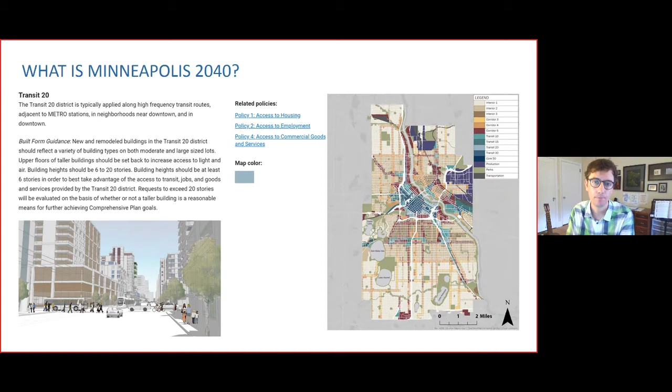Next slide, please. Implementing the built form elements of Minneapolis 2040 is the current focus of our work. These regulations include the height and scale of buildings allowed in each built form district found on that map in Minneapolis 2040.

What our process will not cover at this time is we are not re-examining or changing Minneapolis 2040 maps or making policy changes to Minneapolis 2040 itself. This is simply adopting regulations that support those policies. At this time, the process also does not include changes to where, for example, commercial uses are allowed or required. That's work that we will be doing in the future, likely in 2021, 2022.

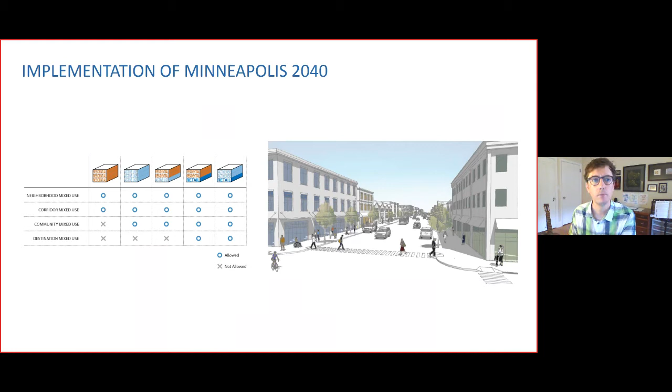Next slide, please. These changes to our zoning ordinances are intended to bring consistency between our zoning regulations and the policies and maps found in Minneapolis 2040. This consistency between plans and zoning is something that's required of us by state law.

We started working on this process last year. Two zoning code changes took effect in January of this year. One was a change that allowed 3 residential units on every property in the city that allows residential uses.

So there are no longer zoning districts in the city that are exclusively zoned for single-family use. The second change is an inclusionary zoning regulation. What that means is that new apartment and condominium buildings are required to provide a certain percentage of their units as affordable.

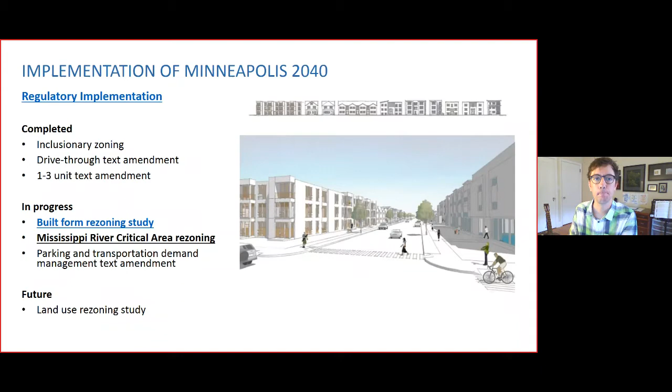These standards are critical components of implementing the goals of the city's comprehensive plan, including eliminating racial disparities, combating greenhouse gas emissions, and increasing access to jobs and housing.

Minneapolis 2040 is much more detailed than previous citywide plans. It clearly spells out the land use and built form categories for every single property in the city. Part of the reason for that is to create more predictable outcomes for all interested parties during the development process. In the past, there wasn't always very clear policy guidance regarding things like how tall a building should be in a certain part of the city.

Minneapolis 2040 changes that. Also, it's been fairly common for developers to submit variances that allow flexibility from certain standards like setbacks and allowed square footage. Our intent is that these new regulations will be applied more rigidly with far fewer variances requested or granted.

Next slide, thank you. All the information you need to review proposed changes to the zoning code can be found at minneapolis2040.com. When you arrive at the website, there is a link at the top of the page highlighted in yellow that will bring you to the built form rezoning study content.

There you can find background information on Minneapolis 2040, info about events like this, and a tentative timeline for review and adoption of these zoning changes by the Planning Commission and the City Council. Most importantly, information about the zoning code changes themselves are available in a couple of formats, and at the end of the page is a form that we would encourage you to use to submit feedback to us.

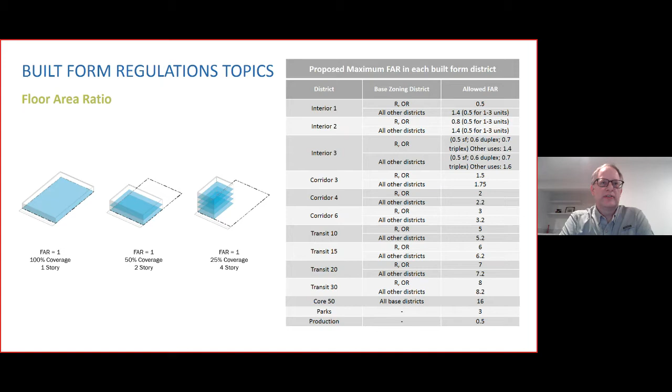So to arrive at allowed FAR, you take the size of the lot and multiply that by the FAR number. For example, if a property is subject to a floor area ratio of 1.0, you take the size of the lot and multiply that by 1, and that's the allowed square footage of the building on that site. This diagram on the left-hand side just shows three very oversimplified examples of how a property with an FAR of 1 could be arranged, how that floor area could be arranged.

So an architect who's designing a project has to understand how FAR intersects with other rules. In a district that's limited to 3 stories, for example, arranging your FAR within a 4-story configuration would not be an option. Looking at the table on the right-hand side of the slide, these are the base FAR numbers that are proposed in each built form district.

In the Interior 1 and Interior 2 districts, we're proposing to keep single-family, duplex, and triplex FAR regulations essentially the same as they are right now at 0.5. And that's the regulation that has historically been in effect for single-family homes since we started regulating FAR for single-family homes. In the Interior 3, just going a little bit farther down to slightly more intense built form districts, we would allow a slightly higher 0.6 for duplexes and 0.7 for triplexes.

And in this table, you'll see that each built form district would have a separate regulation based on whether they are paired with residential zoning, that's the R and OR, residence and office residence districts, or whether they're in a commercial or industrial district.

So that's where it refers to all other districts. Proposed FAR would be slightly higher in the non-residential zoning districts, where you typically don't have setbacks and other things that constrain the volume of a building in quite the same way.

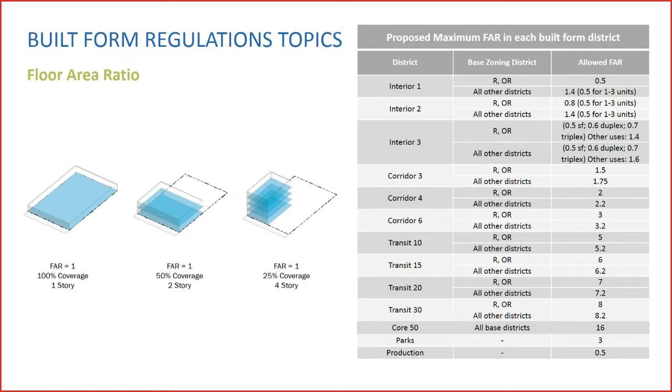Thank you, Jason. Height regulations govern the overall height of buildings and structures. In the built form overlay districts, the focus of the height regulations is on principal buildings. There is specific guidance in the comprehensive plan for height maximums and height minimums in stories.

The maximums are what can be built as of right. In the draft amendment, each district has a maximum height in stories and feet, because the height of a story can vary from building to building. There are exceptions to the table included on the right.

Some of those exceptions are less restrictive, some are more restrictive. Those are described in more detail in the information included online. Minimum height requirements are applied where higher intensity buildings are needed to accomplish comprehensive plan goals, but these do not apply in all districts.

These regulations work together with the FAR regulations to help achieve the goals of the comprehensive plan. Next slide, please.

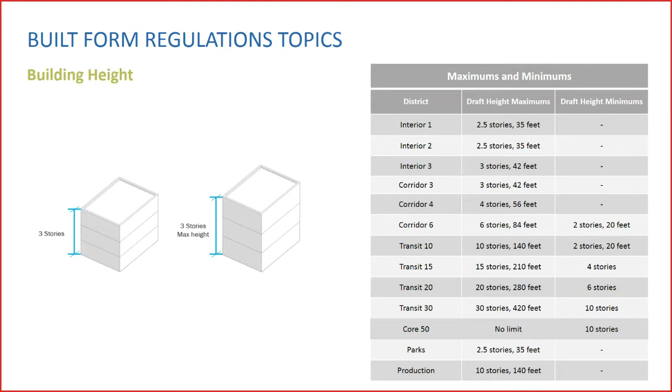A request can be made to increase maximum height. In general, height increases are expected to be more difficult to obtain than they are now. The height increase requirements would depend on the location and the type of use.

Specific to the corridor, transit, park, and production districts, the guidance states that requests to exceed the maximum height will be evaluated on the basis of whether or not a taller building is a reasonable means for further achieving comprehensive plan goals. To address the direction from the comprehensive plan, height increases will be subject to 3 requirements.

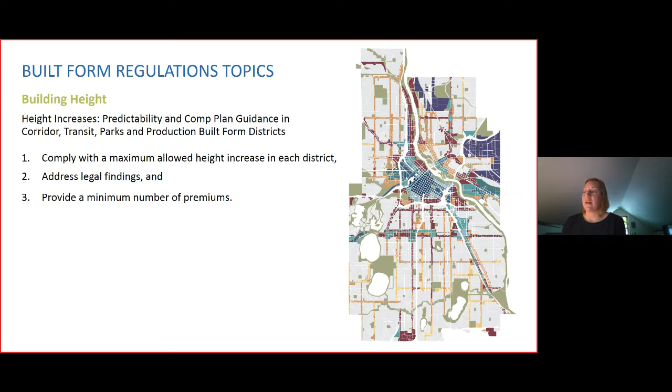The first is compliance with the maximum allowed height increase in each district. This means there will be a cap or limit on height increases. This cap is intended to help with predictability and maintaining the intent of each district.

The maximum allowed increases for the corridor and transit districts align with the maximum height of the next built form district. For example, the maximum allowed height in corridor 3 is 3 stories, 42 feet. The maximum allowed height increase in that district that could be requested is for 1 story, 14 feet, or for a total not to exceed 4 stories, 56 feet—which is the same as the maximum allowed height in the corridor 4 district, the next district up.

Parks and production districts will also have a cap for height increases. If a height increase request does exceed what is allowed for any district, a rezoning and a comprehensive plan amendment will be required. Both of these applications require a public hearing with the Planning Commission and the City Council.

The second requirement for height increase is addressing legal findings. Legal findings are currently required, but they are proposed to be amended to be better tailored to address height increases. These specific findings are included on the website as well, and the findings do allow discretion to be applied.

The third requirement is that a minimum number of premiums need to be provided. To further achieve the goals of the comprehensive plan, each premium is tied to 1 or more goals. The height increase premiums have been drafted to be above and beyond what is typically seen in developments. Each height increase request would need to provide 1 or more premiums, depending on the size of the increase. Generally, larger increases will require more premiums.

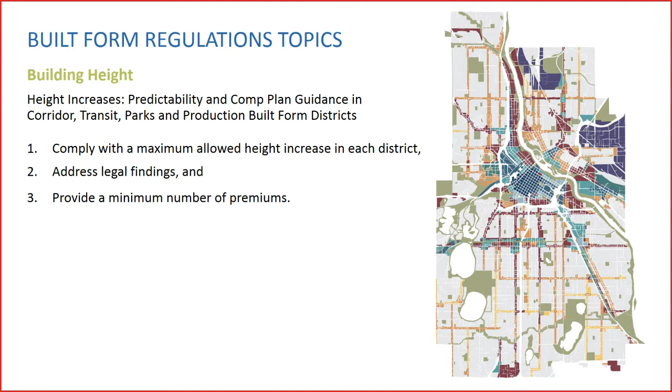As with height, floor area ratio may also be increased by providing premiums. On the slide here, these are all the potential premiums that could be pursued in order to increase height or floor area ratio.

All premiums are tied to the goals of the comprehensive plan, whether it's for FAR or height, and they do exceed the minimum ordinance requirements. They're also intended to benefit the surrounding community in some way. They are not intended to be discretionary, so specific standards for each incentive must be met in order to qualify for the premium. The specific standards that have been drafted are included on the website for review.

The premiums are drafted in a way to ensure that they are practical to achieve, but still result in a community benefit. You'll notice some similar types of incentives for FAR and the height increase premiums. But similarly titled premiums do not typically have all the same requirements when it comes to FAR versus a height increase. The height increase premiums are generally intended to be a little more difficult to achieve than the FAR premiums, so additional standards or a higher threshold usually apply to the height increase premiums. In other words, if you qualify for a FAR premium, you don't necessarily qualify for the height increase premium.

One example would be affordable housing. That's an incentive offered for both floor area and height. In addition to meeting the standards for the FAR premium, something more will need to be provided to qualify for the height increase premium, such as additional affordable units, diversity of unit types, or energy efficient units.

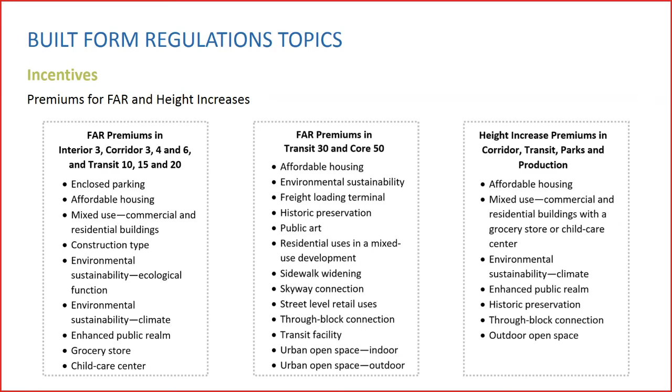Just a reminder, the premiums is a specific topic related to one of the questions we had earlier. So we would again like your feedback on whether or not these are the right premiums to further achieve the comprehensive plan goals. Next slide, please.

Thank you, Janelle. I'll talk about lot sizes now. Lot size regulations govern both the minimum and the maximum size of lots. Minimum lot sizes are intended to primarily meet the two objectives noted here: first, to recognize practical, functional space requirements associated with different uses; and second, to reinforce existing or desired development or built form patterns in different built form districts.

Proposed standards make more use of maximum lot sizes than we have historically done in the past. Such standards limit how many properties can be combined together into a single parcel for redevelopment. So the intent there is to limit the scale of new development by limiting the number of properties that can be combined into a single lot. Next slide, please.

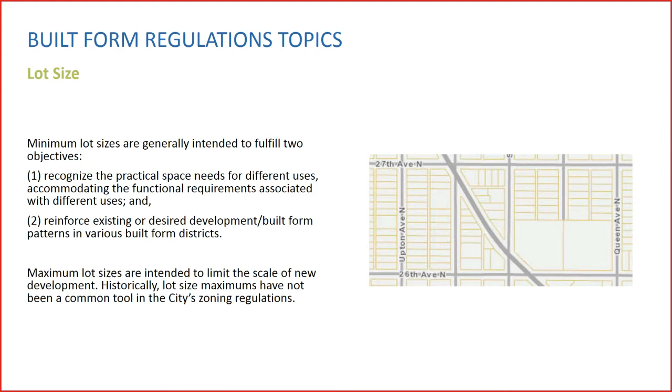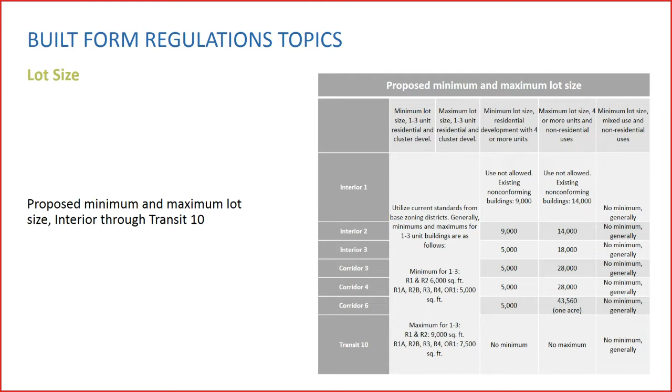I won't go through these line by line, but the lot regulations for 1 to 3 unit buildings would basically stay the same. You can see the minimums and maximums for buildings with 4 or more residential units in the second column from the right. And in the right-hand column, we're showing that commercial uses and mixed-use projects in commercial districts would continue to not have minimum lot sizes, with the exception of certain very specialized uses. Next slide, please.

We have a couple of slides to demonstrate examples of maximum lot sizes. This slide shows Corridor 4 policy guidance along Lowry Avenue Northeast. You can see that the district would typically extend about 4, sometimes 5 standard lots from the corridor itself of Lowry Avenue in this case. With each of these lots being roughly 5,000 to 6,000 square feet, that roughly aligns with our proposed maximum lot size in Corridor 4 of 28,000 square feet. Next slide, please.

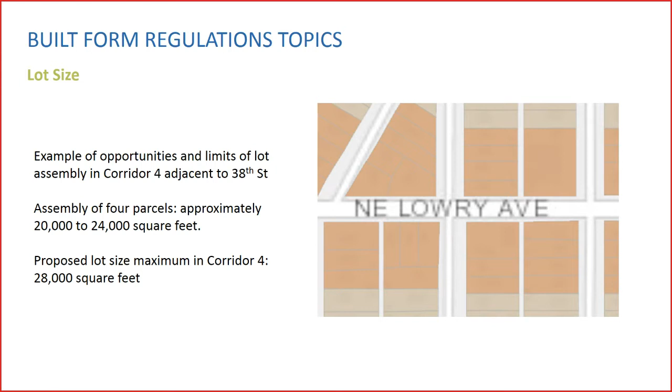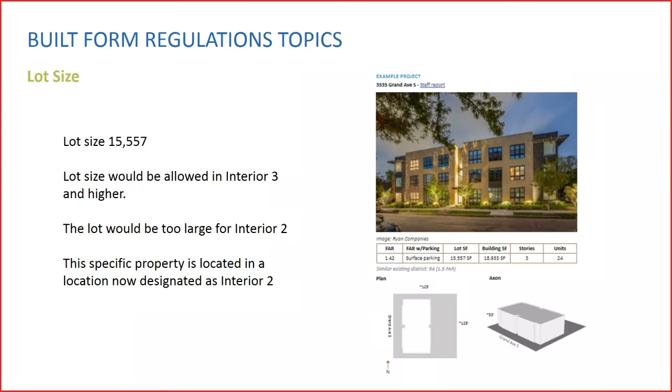In this slide, you see an example of an existing development at 3535 Grand Avenue South. This happens to be on a lot that has a little over 15,000 square feet. That means this development would first be allowed in the Interior 3 district. The lot itself would be too large to be assembled in the Interior 2 district. I'll turn it back to... I'm sorry, I think next slide is lot coverage and impervious surface, which I will also cover.

Lot coverage addresses the amount of a lot that can be covered by buildings, both principal and accessory buildings, so houses, garages, sheds, etc. In the Interior 1 and Interior 2 districts, we're proposing to match the lot coverage standards that currently exist in our lowest intensity zoning districts. Then you'll see those numbers increase slightly again as the district gets more intense. We would continue to not have maximum lot coverage standards in our commercial zoning districts. Next slide, please.

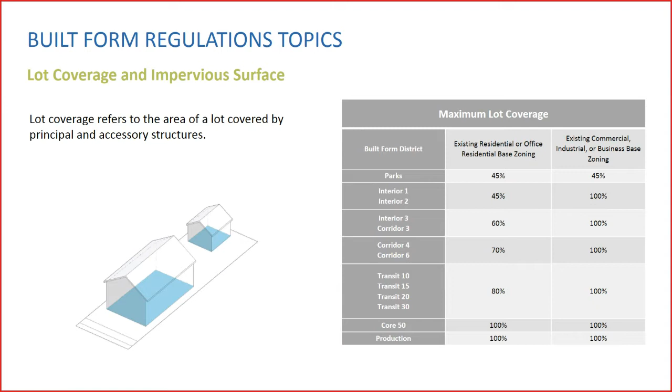Maximum impervious surface works in conjunction with lot coverage standards. It addresses not only buildings but also additional impervious surfaces like walkways, driveways, and patios. So it's a slightly higher number than the lot coverage number.

In Interior 1 and Interior 2, we're proposing to match the impervious surface standards that currently exist in those lower intensity districts. No maximum impervious surface standards would exist, as is the case today, in commercial, downtown, and industrial zoning districts.

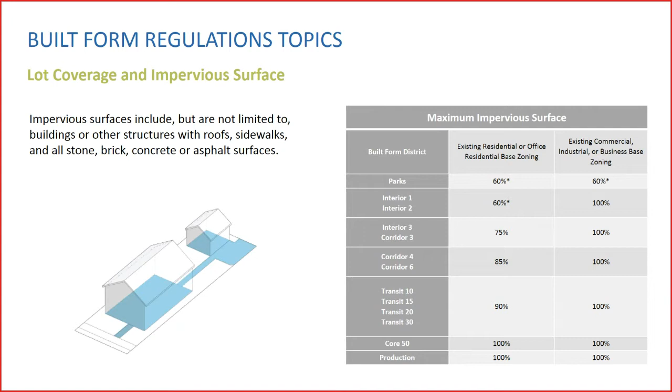Our next topic is related to setbacks. Setback regulations, also called yard requirements, indicate how far from a property line a building or other improvement is allowed to be built. Setbacks are utilized to separate uses and structures and are another part of regulating urban form.

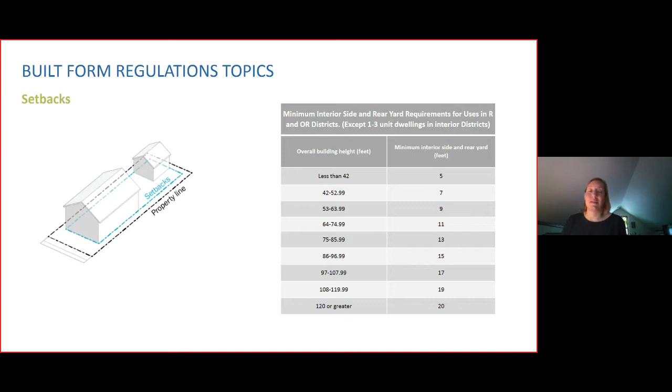All built form overlay districts will contain setback regulations. Larger setback requirements apply in residential areas versus non-residential or mixed-use areas, which at times do not have a setback requirement. Not all yard requirements are proposed to change from what is currently required.

In most non-residential and mixed-use areas, the setback requirements are not proposed to change significantly from what is currently required. In residential interior areas, the setback requirements for single, 2, and 3 family dwellings are also not proposed to change significantly from what is currently required.

For example, the front, interior, side, and rear setback requirements for a single family dwelling on a pretty typical 5,000 square foot lot that's 40 feet wide won't be changing.

In residential areas for other uses besides dwellings with 1 to 3 units, some requirements will remain the same, but some more significant changes are proposed as well. The changes that are proposed are generally less restrictive than what is currently required.

The most significant change proposed is to the interior side yard requirements. These are shown in the table on the screen.

Unlike current requirements, the proposed setbacks are based on building height in feet instead of stories. Determining setbacks based on height in feet is a more consistent way to apply a setback requirement, since the height of a story or stories can vary from building to building. The building height ranges used to determine these setback requirements are based on average floor heights for residential projects.

I'll use a 3-story building as an example to compare the current requirements to the proposed requirements. The average height of a 3-story residential building is just below 42 feet. Under the proposed side yard requirements, the minimum setback requirement for an average 3-story building would be 5 feet.

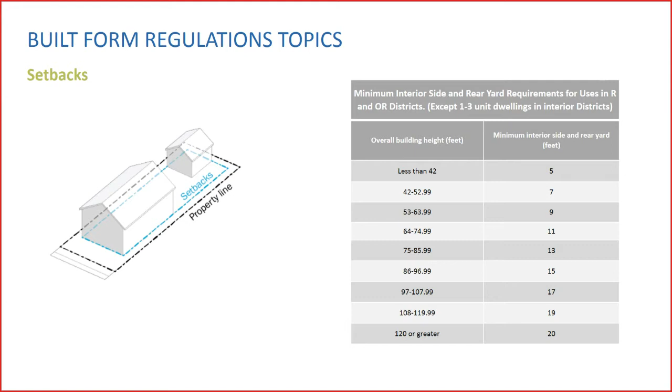Switching gears a bit, the next topic is the Mississippi River Corridor Critical Area, which was established by executive order by Governor Anderson in 1976, the purpose of which was to protect natural, cultural, and scenic resources in the Mississippi River Corridor. In response to concerns about the adequacy of critical area regulations, the state legislature adopted rules that became effective in January of 2017.

The intent of these rules is to better regulate the critical area. The city is required by the DNR to adopt a zoning overlay district, maps, and a permitting program for the critical area to implement the rules locally.

The critical area has separate districts, each with height, setback, and bluff setback regulations. The built form district requirements will also apply to properties in the critical area, with the more restrictive of the built form or the critical area requirements applying to properties.

More information on the critical area regulations can be found on the website, along with maps of the critical area districts that are illustrated on that map on the website. That concludes the overview for the built form topics.